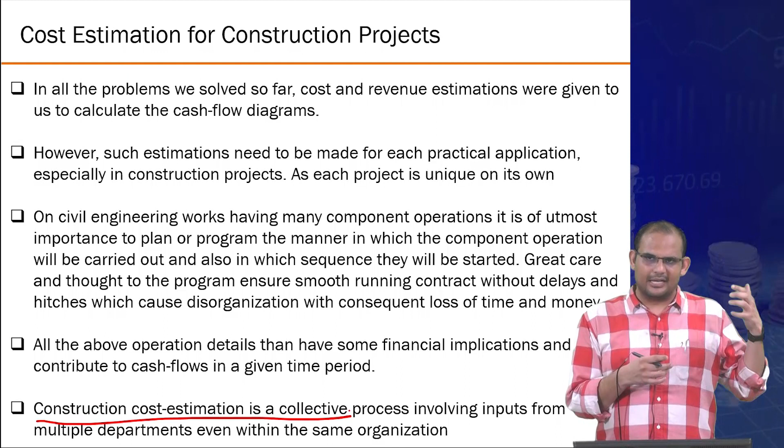So typically you will see, even in the organizational structure, at least in Indian companies, your finance department takes their monitoring activities really seriously, right? Because they want to get the latest information, almost a real-time estimation of what is happening, what the cost is. Because a lot of people ask them for this information whenever they have to plan for the next. So the finance department is really important. Their job is not just to pay you salaries and things like that. Their job is to maintain the repository of what is happening, what the material price is, or how much quantity they have estimated before, a really large repository, and then be able to help you estimate, right?

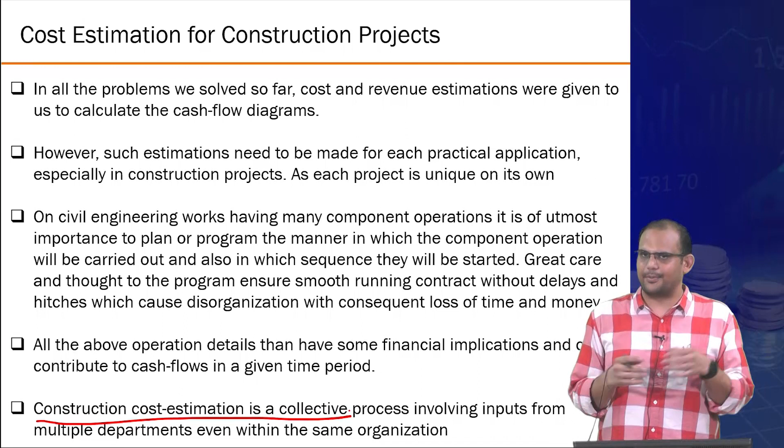I'll just give you some ideas on what kind of information you may need to calculate the typical costs that are involved in a construction project, right? So the first and foremost thing is, it starts with a construction schedule. For those who don't know, suppose you have 10 activities to finish in a construction project. That could start with digging up the ground, then laying the foundation, starting to construct the pillars, maybe the bricklaying, then the roofing, things like that. Then finally you do some sort of tiling to make it look good, painting and all.

Each of these are activities, right? And not all of those activities will happen simultaneously. There is a sequence of activities; something needs to be done before something else can start. For example, pillars cannot be erected before you actually finish the foundation work, right?

So because of that, what happens is you have some sort of diagrams in terms of how different activities are distributed over time, right? And this is very essential information, because once you know the activity, then corresponding to the quantity of that activity, you can estimate, in order to do this much activity in this much time, how many resources you will require and at what time, right? Resources could be materials, labor, equipment, machinery, whatever. But essentially, this is a fundamental backbone for calculating that.

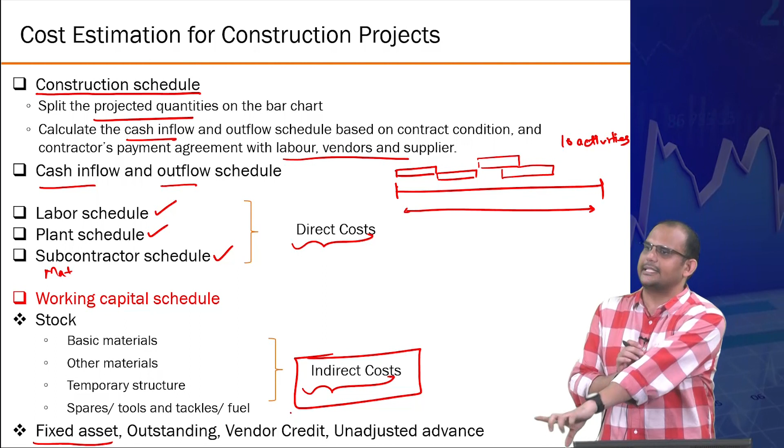And then there are other types of costs; we also saw before the fixed costs versus variable costs distinction. But here, what is most important for you is to know the direct versus indirect distinction. There could also be, for example, headquarters cost. Now, changing the scale of the discussion, while it is difficult for you to attribute some specific element to a specific activity, it is also impossible for headquarters to attribute a specific activity to a specific project, right? Like saying 0.1 man hours of a headquarters design person was useful for this activity on the construction site. It's impossible to do that analysis and often useless to do such a detailed analysis. Therefore, you club them as a whole and put them in indirect cost, right?

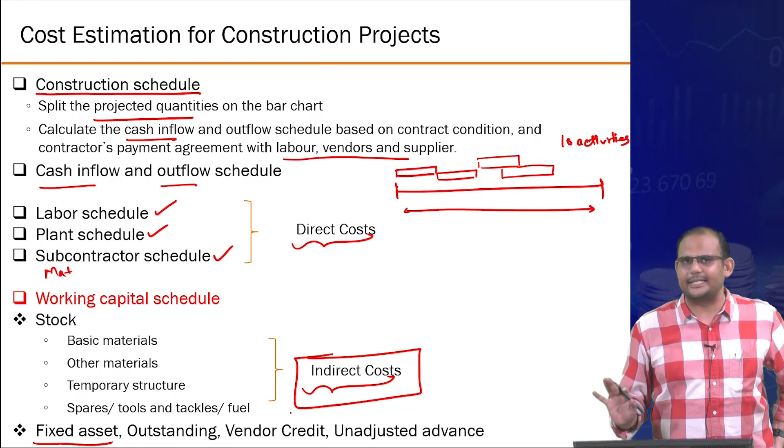Sometimes it also depends upon what you define as direct versus indirect, or how rigorous you want to be in this exercise. It also depends upon the relative volume. For example, if your direct costs are already about 80-90%, then it's okay. You can accept not knowing where the indirect cost is going; it's not significant because 90% is easily accountable. But it could be that initially you do not map the activities one-on-one and you end up with 90% indirect cost and 10% direct cost. Then you will not know what is happening with the cost and you will not be able to have better control over it. So, it also depends upon how granular you want to go, depending on what kind of activities you are doing. Okay, so basically, we are dealing with direct and indirect cost.

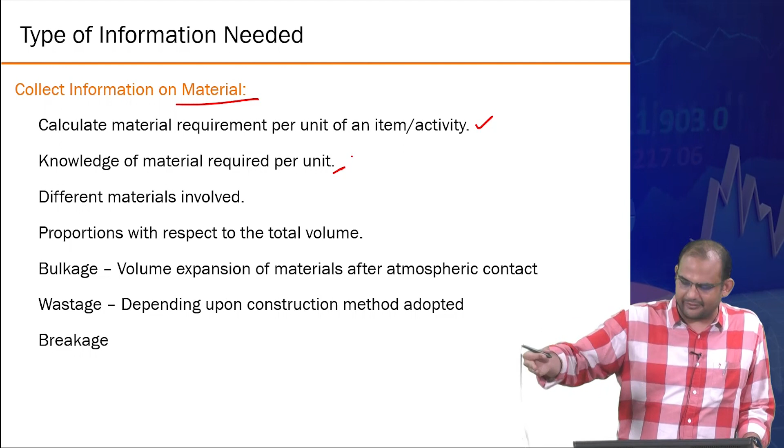Now, let me give you an example of the kind of information needed for each of these. Let's take an example of a direct cost, particularly material. In material, what factors could affect the cost, right? There is a direct requirement in terms of how many units of material are required per unit of activity, right? So, you need to know the material required per unit. You also need to know how much of the activity will be done in a specific time. With that, you need some factor of how much material is required per unit of that activity. For example, in 1 cubic meter of concreting, how much aggregate you require versus how much cement versus how much sand. All these things you can do.

Different materials are involved, and you need to have an idea. You cannot be just going blind. Every activity has different types of material requirements, proportions with respect to total volume. Sometimes if you are dealing with cubic meter as a unit, then 10% of it is this, 10% of this, and 10 to 20% is this material. All those ratios you need to have.

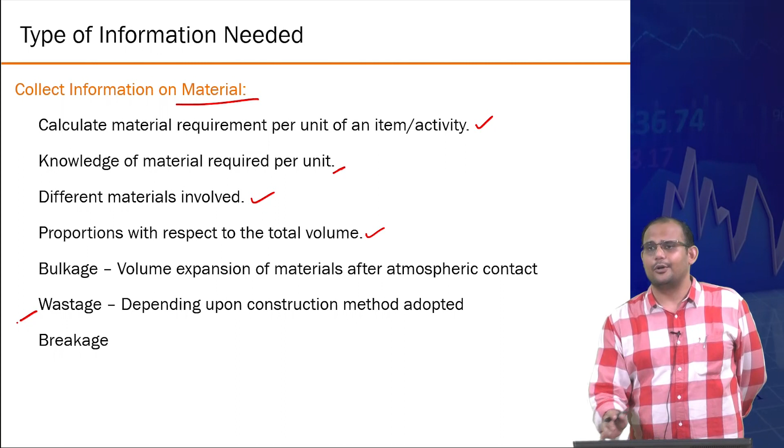There's also a problem of wastage. 100% efficiency in material usage is not there, because typically when you're preparing for some sort of transformation that requires concreting, you mix raw material, then you add water, but then you are shifting it across so many different equipments. You can't remove the wastage 100%. There will be some concrete which will be stuck to that mixer and you cannot get it out easily, and so on and so forth, right? So there is always a wastage.

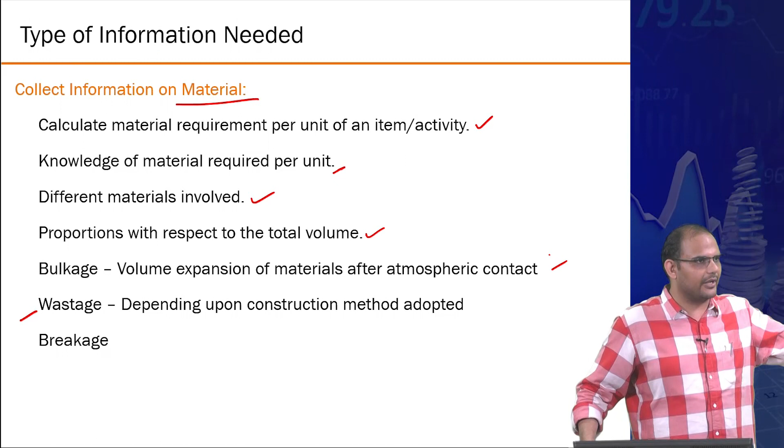There's something called bulkage, which is essentially that construction materials' final volume would be different than the sum of their individual constituent materials' volume. For example, sand mixed with water expands a lot, right? So this becomes an important consideration when you have to deal with transferring sand from one place to another, and that becomes part of your costing, right?

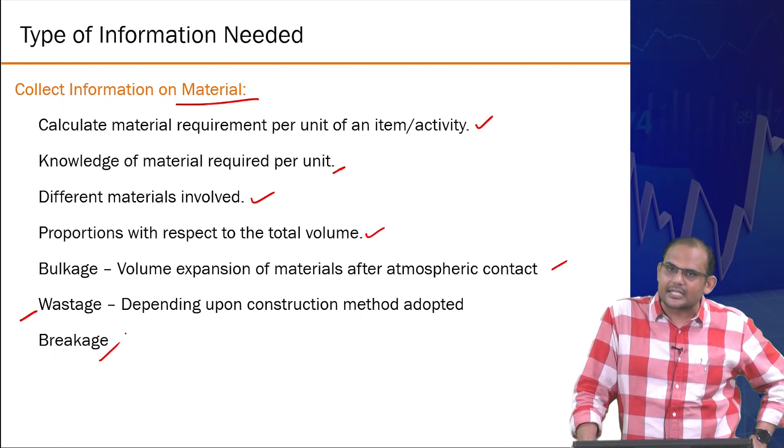And you might be dealing with breakages, other kinds of things. If you're dealing with glass, for example, it might break. Even after you have applied it, sometimes it might break. So again, you have to work around that.

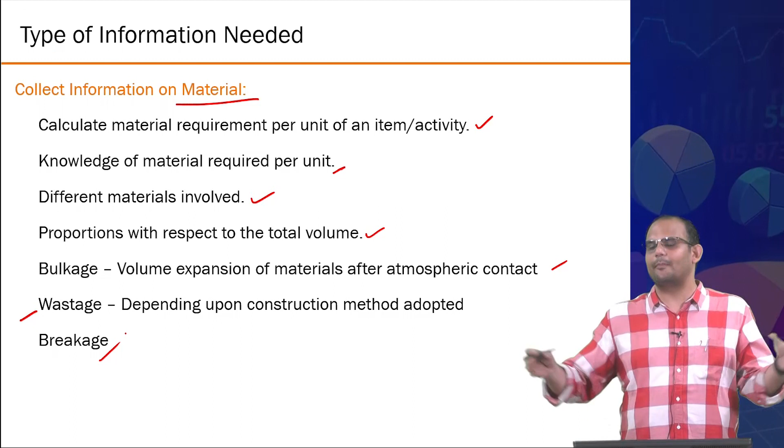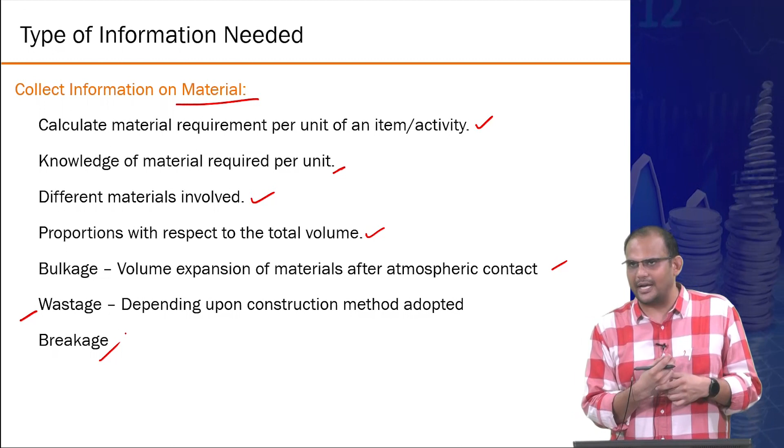In terms of wastages, I think a good example would be the rebars, right? The rebars come with a pre-specified size from the manufacturer. So depending upon how your rebar schedule is able to accommodate, you might end up with so many small pieces, or you could have optimized your rebar calculation so that you are having whole bars or longer bars compared to many small bars. Because small bars, you can never use them again. Longer bars as additional material, you can even sell them back or use them for some other activities. So all of this is information required.

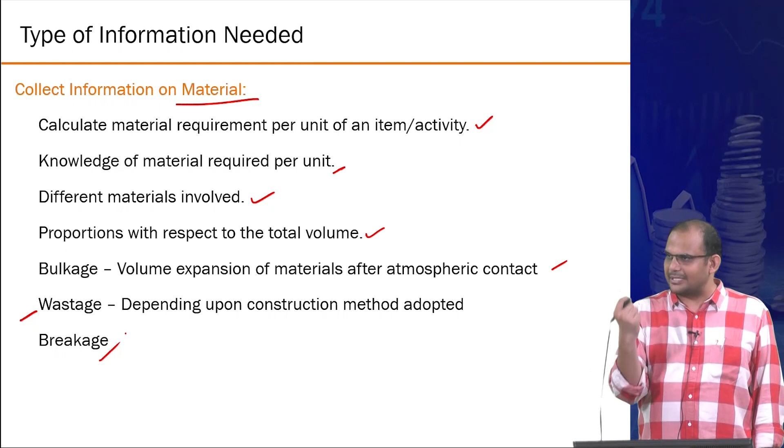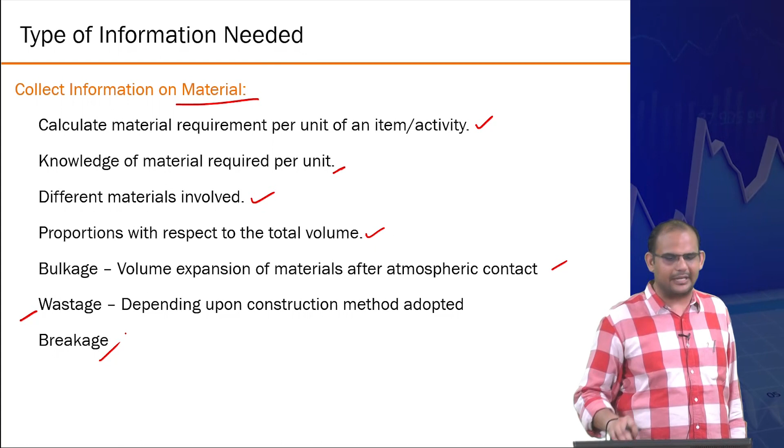So immediately you can see just the material calculation can become so complicated because there are so many different details involved in it, right? So it's very important. The job is quite serious in a way that you need to have information from many sources, right?

Just labor: if you want to estimate the human resources requirement, of course you will have to estimate how many people of what type are needed. You also need to know what is the average output of these people in terms of how many units of work they can do in a given unit of time. Now, depending upon whether they are skilled or unskilled, this number could change, or the kind of contribution they bring to a particular activity could change, right?

Then there are labors of different types. There are labors involved in individual departments who are just there for checking, approval, or some sort of supervision, sometimes just guidance. You have plant operators and helpers taking care of a particular machinery, things like that. You have different types of masons, carpenters, fitters, helpers. Then you have subcontractors' laborers coming on your site. You could have a distinction between male and female laborers, because you might need to have different facilities prepared for them, and that will have different cost implications.

So you can imagine how messy it really becomes. There are so many variable factors on a construction site. So it's not a job of a single person to handle all this, right? Just giving you an idea.

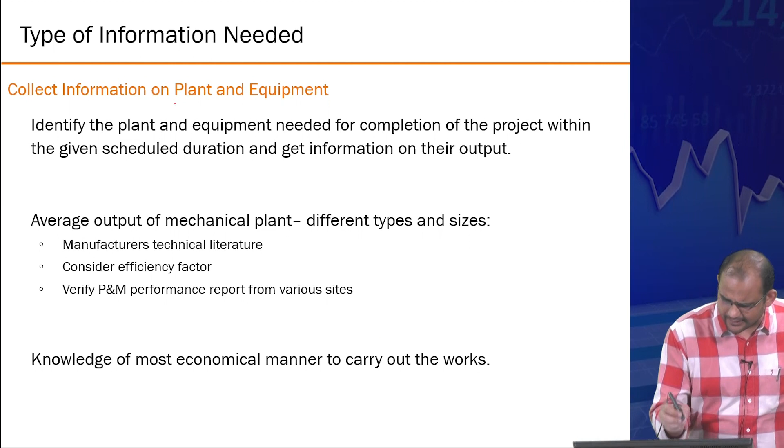Again, in terms of plant and equipment, you need to identify what kind of machinery and equipment will be needed in order to complete the project in a given schedule. And you also need to understand how productive these equipments are, right? How many units of work the equipment can do in a given number of hours. And therefore, you may need to understand the technical specifications sometimes provided by the original manufacturer of the equipment, right? When you buy a computer, you rely on the motherboard's speed and frequency and all this information. Sometimes you may need to do that, right?

For a crane, how fast can the wire actually move in a second, in a minute? All these are specified by the crane manufacturer in terms of safe operating limits. Can you really move faster, or can you make it really slow? All those things you need to know. What are the ranges? Otherwise, you'll not be able to estimate it properly.

And the machine itself may not break as much, but the machine is clubbed with a human. So the average efficiency of both of them needs to be taken into account. A human will require some break, even if working a simple job, just pressing a button. You can't keep on pressing the button for 8 hours at the same efficiency level.

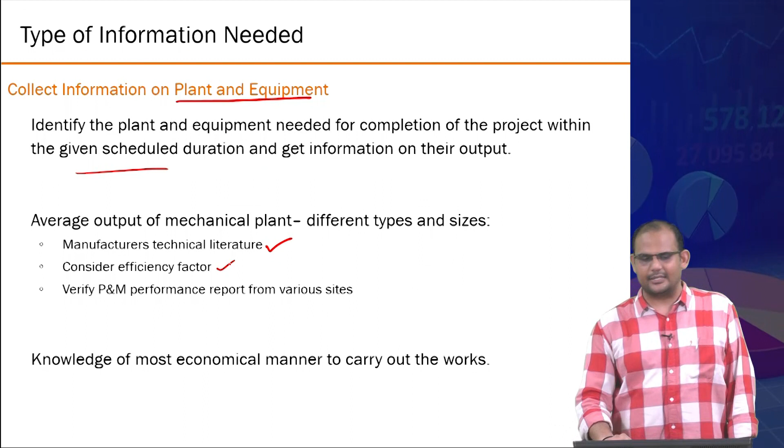But the machine only works when the button is pressed, even though the machine's efficiency is not different. So with a combination of them, you need to have a joint estimation of the efficiency, and many things. The whole idea is to show you that this is a slightly complicated topic when you actually have to

do it. And typically you will see people working in the finance department, over the years they accumulate so much interesting knowledge about the whole system because they have gone through so much information exchange. They really understand what's happening, what's not happening, where things are, where things are not. So they become very knowledgeable. So that's always there. This is just to give you an idea.

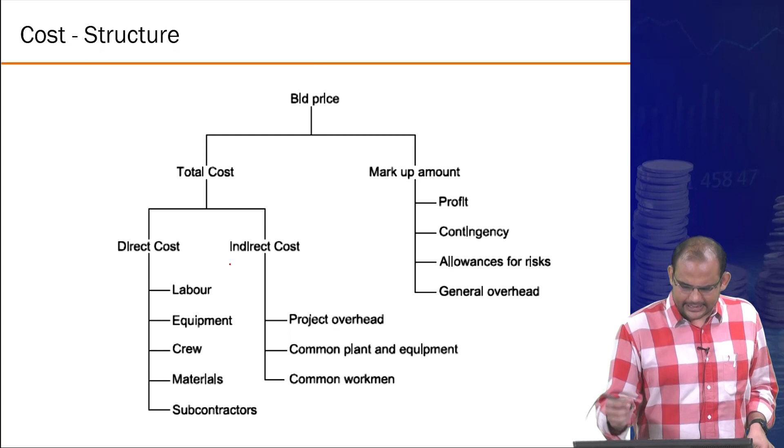Again, this is not directly related to our discussion topic, but a typical bid is essentially the price that a vendor or a subcontractor quotes, that I will do this work for this much amount, right? In a typical bid, of course, there is some profit percentage, margins and all, but it also involves a component of cost. If I have bid, let's say, 100 rupees, it could be that 20 rupees are my

expectation of profit for the risks that I'm taking or whatever. 80 could be my actual cost. It's not like 100% of it is coming into my pocket, right? There is a cost to actually do those services. And this is the general structure that you follow in any civil engineering project.

The direct cost: the labor, the equipment, the crew which handles the specialized machinery, the materials, and any subcontractor cost. These are classified under direct heads. Then the project overhead: the common plant and equipment, and common workmen. Common workmen could also be there. Some specialized machinery, for example, or a project manager, let's say. He or she is overseeing everything.

They are not attributed to any specific activity. So they are also considered in the overhead and sometimes in the indirect cost. Okay, this is a general one. Depending upon how granular information you have, you could attribute some here and there. This is the generic structure we follow. Okay, any questions so far?

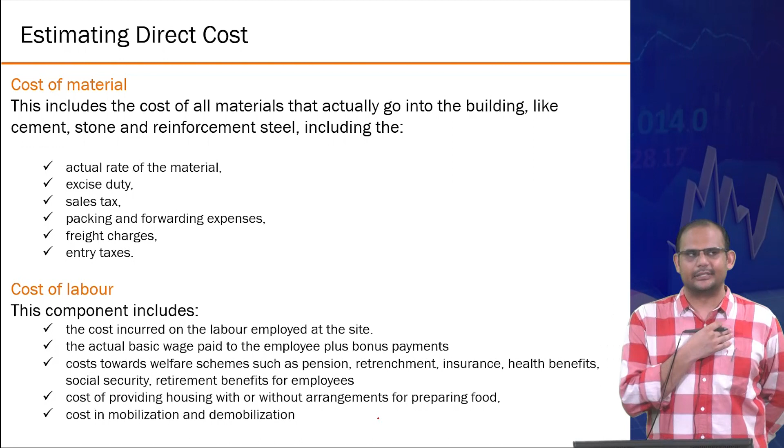Too much story, no numbers? Let me see if I can bring numbers. I'll bring them soon. But I'm still giving you a little bit more idea on what kind of details are needed in order to estimate these costs.

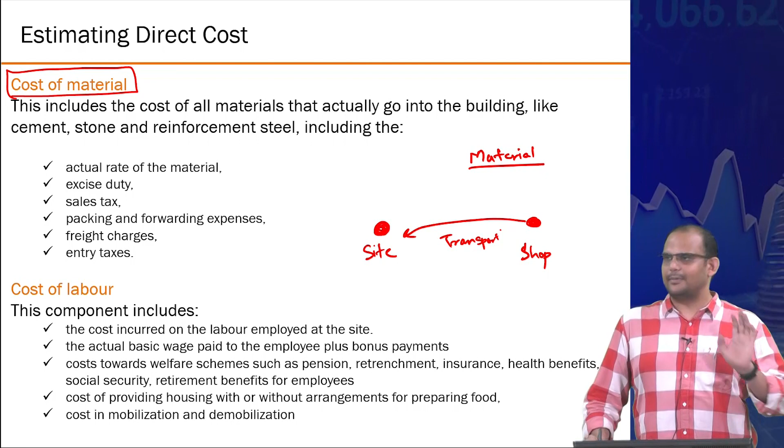So direct cost, when you're talking about cost of materials, I'll give you an example. When you are buying material, it is not being produced at the site, maybe at a shop, right? And there is going to be a transportation cost, right? Now one possibility of accounting is that all transportation cost you will deal with separately. Then you will identify individual transportation costs associated with each of these materials each time it came, right?

Or the other possibility is that you club this transportation into the cost of the material that you're talking about. Maybe 1%, 2% of the material cost typically goes into transportation, and therefore does not require any additional mention. It's just clubbed with the material cost, right? That depends upon what you are interested in.

If as a company you are worried about your transportation cost, then maybe you need to do the exercise where you track individual transportation cost very minutely. In that case, the material cost will be separate, the transportation cost of total material would be separate, transportation cost of machinery would be separate, and things like that you can still deal with. Or you club all these into the individual activities, and that is still okay, not a problem.

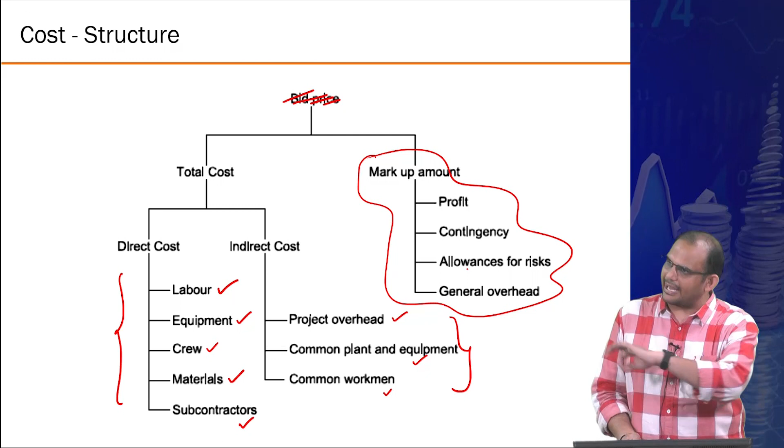So it's not 100% foolproof that this method will cover every possible type of cost. Depending upon your chosen reference or how detailed you want to track a particular cost, you could adopt something slightly different, right? Theoretically, you should be able to attribute each transportation to each activity. But then if a laborer takes an Uber to come, which activity does it go to?

Or a project manager takes a car to come to site, and the fuel cost of that will go where? Right? So all of this becomes messy. You can go as detailed as you like, but then is it really worth it is the question, right? So this is a general one, but it can change depending upon what you want to do.

All right. So in general, for cost of materials, there is the actual cost of material. Sometimes you need to pay some taxes. So again, if as a company you are interested in how much tax you are paying, then you might tackle the tax separately. But on the other hand, you could say, okay, the lump sum cost of material is 110 rupees instead of 100 rupees. That's the calculation I'll keep and I'll count it completely as a material cost, right?

See, in modern uses of computers, you can actually do this easily because at the click of a button you can aggregate that same data differently and you will still get good estimates. But how does it go? Sometimes the billing itself does not have that minor level of detail once it finally goes into a digital system. Therefore, it becomes a problem.

Sometimes you can't even track all these things, right? Packaging of the material: if you need to pay, do you count it separately as a packaging cost or do you count it as a material cost? Freight charges, entry taxes, all these things are typically included directly in the material price for per unit calculations.

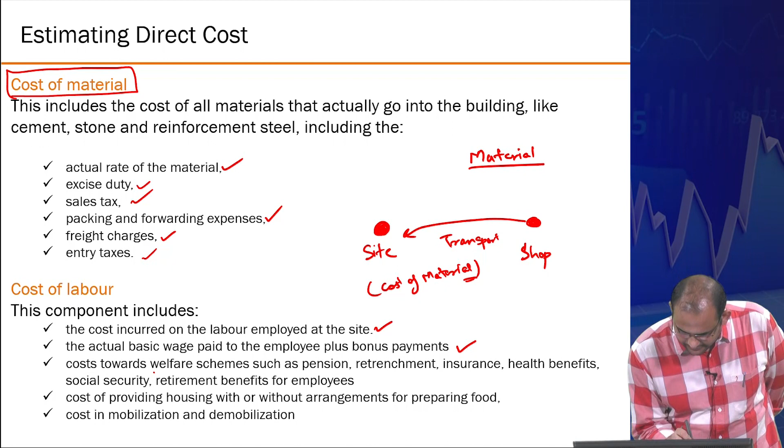Okay. In labor, there is the actual cost to employ the labor on site, which sometimes involves the basic wage, average wage, plus the bonus, right? Bonus you could track separately or you could keep it there. Welfare schemes, pensions, retrenchment, insurance, health benefits, social security, you could again track them separately, or per unit labor you could track to a specific activity, right?

Cost of providing housing with or without arrangements for preparing food. All these are real issues. You need to have a suitable facility for labor to live in because you don't want them to travel from somewhere every morning, or sometimes your schedules are working in the night. So they need to have a labor camp nearby, and their families will also live there. So these are all part of your cost of construction projects.

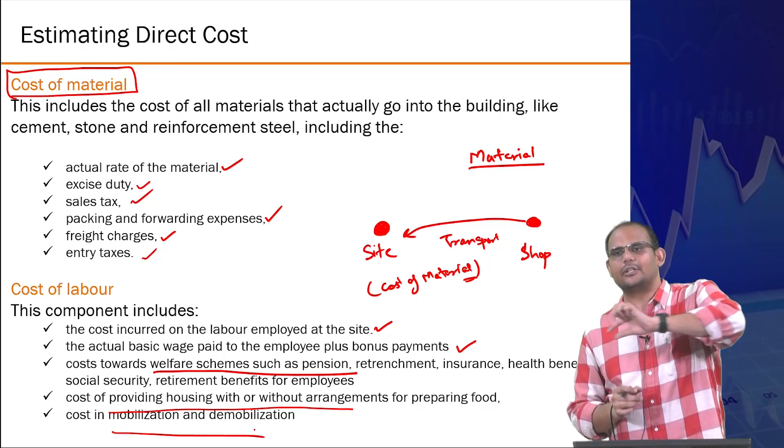And sometimes there is mobilization and demobilization, in that you need to bring, let's say, 100 laborers from a particular place to here. Now they could ask how will we come? You need to arrange for a transportation vehicle, maybe a bus or whatever. So all these are in general attributed to direct labor cost instead of tracking each of them separately, so that your life becomes a little bit easier, right?

So the main point that I'm trying to tell you is there can be even more detailed bifurcation, and you could attribute some of this cost to an indirect cost theoretically, but is it worth it is the question that you need to ask before you start doing that.

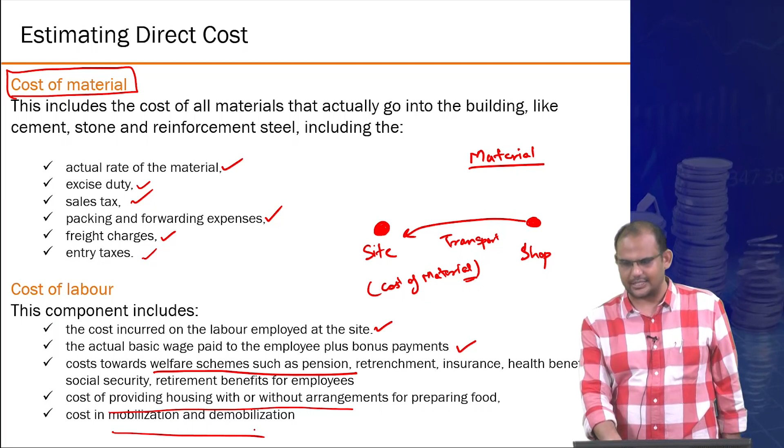Right, then cost of plant and equipment, it has many things. For example, of course, you are either owning or leasing, so that's the cost required. Mobilization: sometimes you bring a machine and then you need to assemble it on site, so you need to have a cost built in for that. Operating, which you are paying the laborers for. Cost of fuel, oil, lubricants; all these machines require diesel or some sort of fuel source. Where is the cost of that going to go?

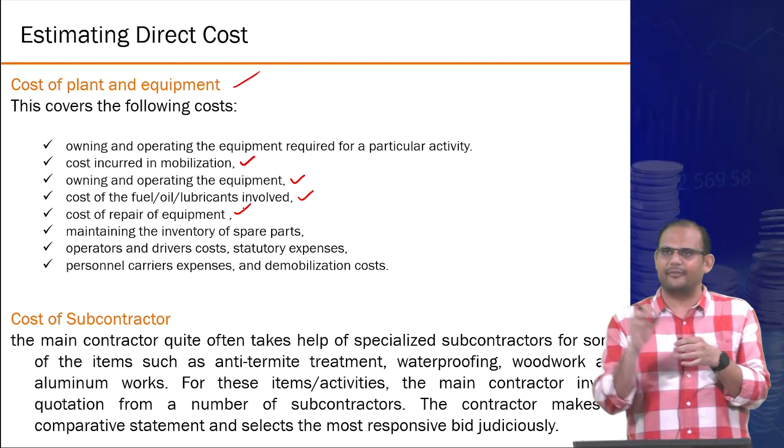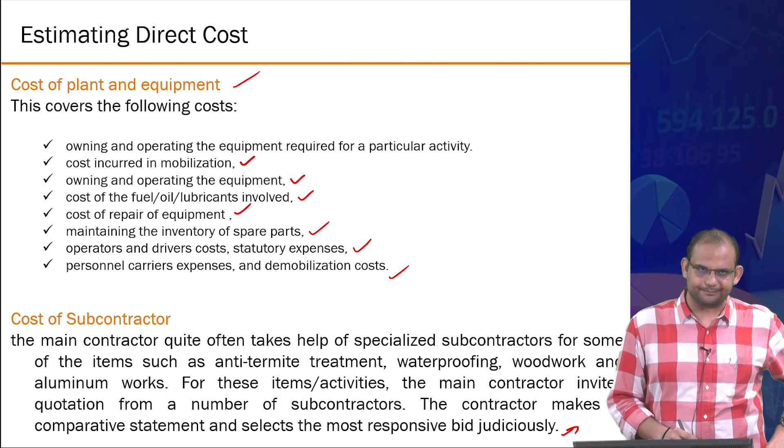If repair is required, in construction you will rarely find a repair or maintenance head in the balance sheet or in any project activity, because that is just clubbed into the equipment part. Okay, whatever 5% money we paid, it goes into the equipment side of it. Maintaining spare parts, operators, drivers' cost, any other demobilization cost. These are typically included lump sum under plant and equipment, and therefore it goes directly to a particular activity, right? And subcontractors is again a similar story. With me so far? All right.

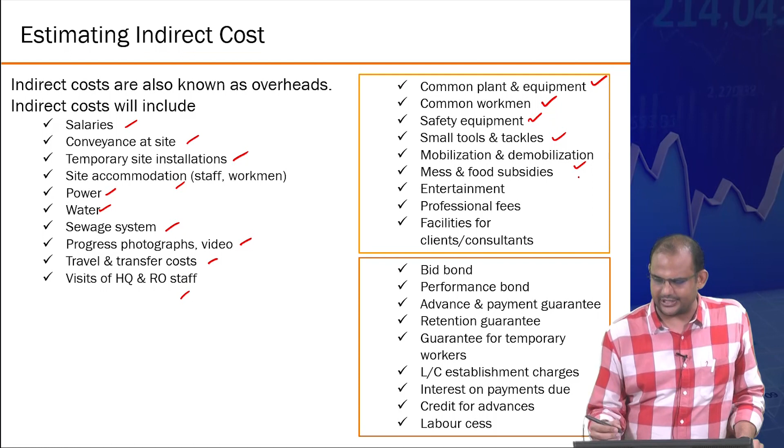Common plant and equipment, safety related equipment, for example safety nets; these keep on moving up floor by floor. You can't attribute them as this is floor 1 safety equipment, kharcha itna, right? You can't do that. So typically that goes into common. Small tools and tackles, mobilization again, mess and food subsidies, entertainment purposes.

See, as a project manager, it's not only about getting the machinery done; you are ultimately leading people. And for people to function, all these things are basic necessities. You do need some sort of entertainment, some sort of regular life outside the work, and you need to accommodate them, otherwise your projects will not function, right? So if you actually go to some big sites, you will see labor camp management itself becomes quite an interesting and challenging task, because machinery can function on remote or robotic or whatever your instructions are. People you need to deal with differently.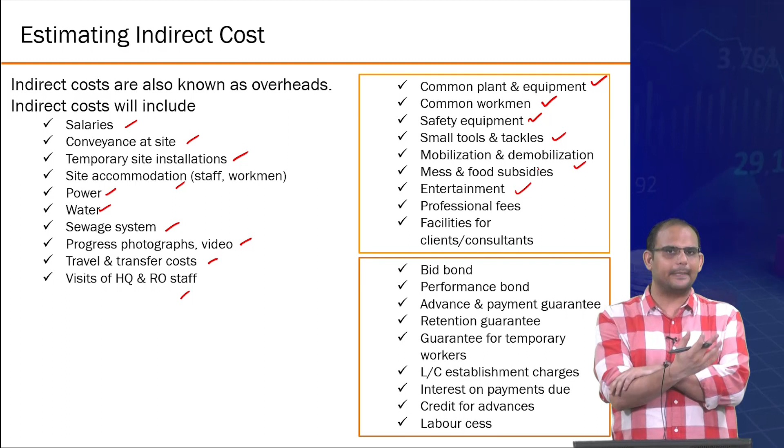And in general, good project managers will always have good people management skills as well, right? So that's a part of the job.

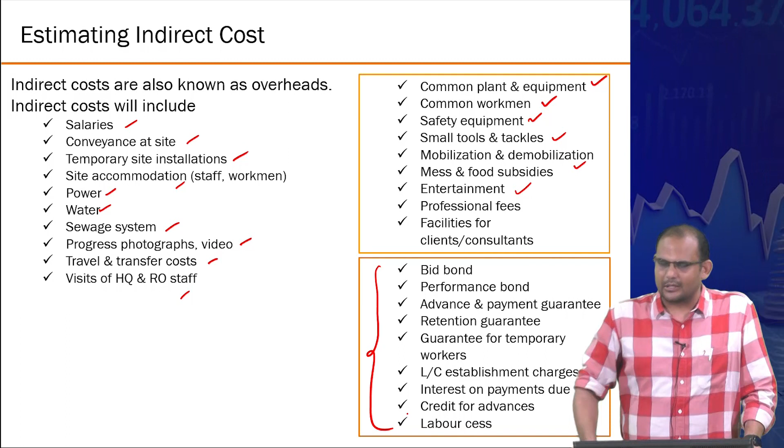And then there are certain indirect costs. This is more on the contract side of it, which I'm not going into in too much detail, but essentially there is a lot of money that you may need to give to the client as a guarantee that you will do a good job, and the client wants to secure their position. It's basically risk transfer, like bid bond, performance bond, advance payment guarantee. These you can attribute uniformly over the entire project.

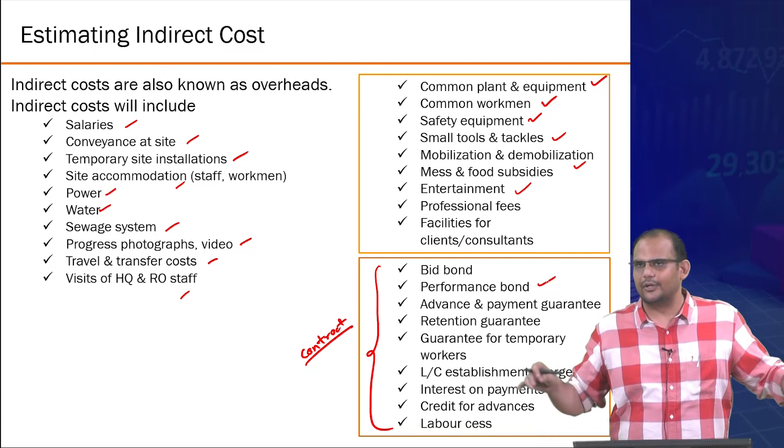Okay. All right. So I'll just leave it here. You can go through these slides later. Again, just skipping one slide.

Now, essentially, how do you do this? The simplest way of dealing with this is you define something called a unit. You estimate all the charges per unit, and then you simply multiply the number of units with that per unit cost to estimate the total cost, and similarly you keep on aggregating different types of units. That's the idea.

Now, the definition of unit keeps on changing. That's the tricky part, because you cannot have one uniform way to define a unit. Concreting work you define through cubic meter, usually a volume. Wall paint job you usually define in meter square, which is the surface area. Brickwork, sometimes you define by number of bricks, or you could define it by surface area also, because the depth of the brick remains the same. So it's tricky, it keeps on changing.

But the idea is you define the activities, you define a unit, you calculate the total number of units, you estimate the cost for each unit, and you aggregate to get the total cost that we need to estimate, right?

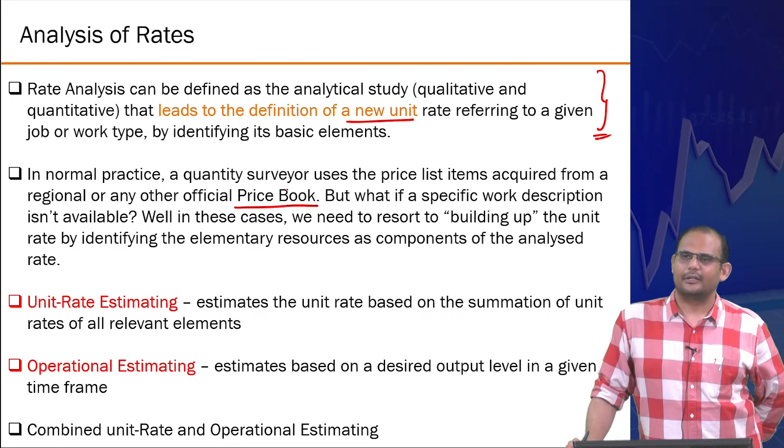Now, how do you estimate the cost of an individual unit? You actually rely on something called a price book, also often called a schedule of rates. Typically these are government issued norms, that for skilled labor, this is the average acceptable price, and this is available state by state, and periodically gets updated every 5 or 10 years. In India, you have a reasonable number of estimates.

So you could rely on these numbers as a reference, or if it's a very specialized activity that does not fall into any of these predefined units, you could create your own unit and do the estimate for that. That depends on your project requirement. But the typical idea is that you rely on pre-existing units as much as possible, or you define yours and then do the work.

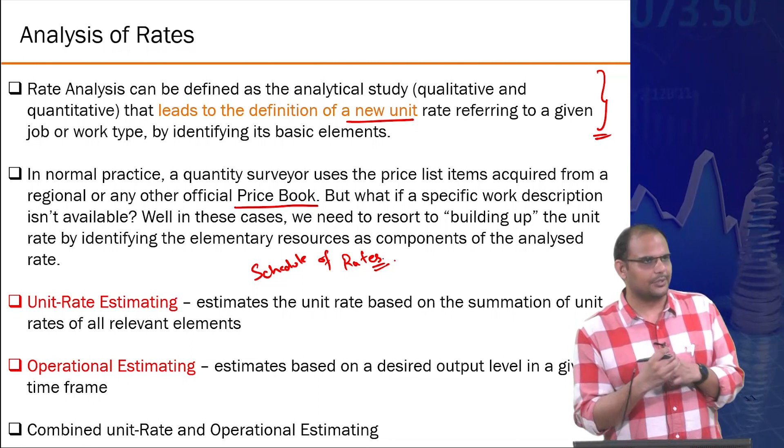Okay. Now there are two major ways, again just for the definition of it. In reality, you end up using both of them together; there is no clear way to distinguish them in a real project. One is called unit rate estimating, where you estimate the unit rate based on the summation of unit rates of all relevant elements.

For example, in 1 cubic meter of concrete, 20% of that is sand, so what is the cost of that 20%? 30% of it is cement, what is the money involved for the water, whatever. You combine them and say this is the unit rate of 1 cubic meter of concrete, because so much material was required in that.

The other is operational estimating, which essentially deals with productivity norms. For example, if you want to estimate the labor charges for 1 cubic meter of concrete, how do you do it? There is no per cubic meter labor charge. You have to estimate how many laborers for how many hours would be required to achieve 1 cubic meter of concrete, and then you balance them out. So this productivity related information is also essential.

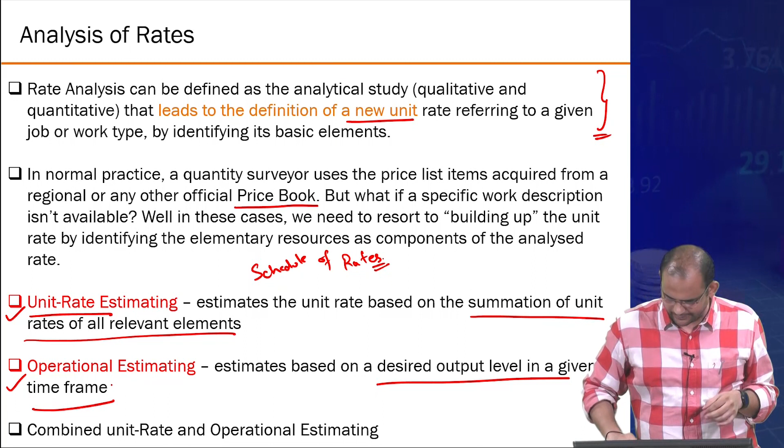So this is called operational estimating, and typically you combine both of them in a measurement, and I'll show you an example. But you got the basic idea. One is simply summation of the cost in a proportion. The other relies on productivity related norms. In reality, you need to do both; there's no one way about it. Alright, so let me give you an example of unit rate estimating.

Do you know what OPC 43 is? Basically a grade of cement material. 1 metric ton is 1000 kg, right? So let's estimate how much is the cost of cement needed, right?

So basic rate of material, cement factory price inclusive of all taxes, not excluding. It's basically cement factory price plus all taxes. This is the basic unit. For what is this? This is only for cement. This is not even for concrete, just for cement. Okay, you are not dealing with concrete. 1000 kg is the total you need to estimate it for.

So unit is 1 metric ton, quantity is 1. For the cost, you assume that these costs are given to you, maybe from some reference material, or you have collected all this information. So this comes out to be 5,700 rupees, right? Transportation to site, maybe a flat fee of 1000 rupees.

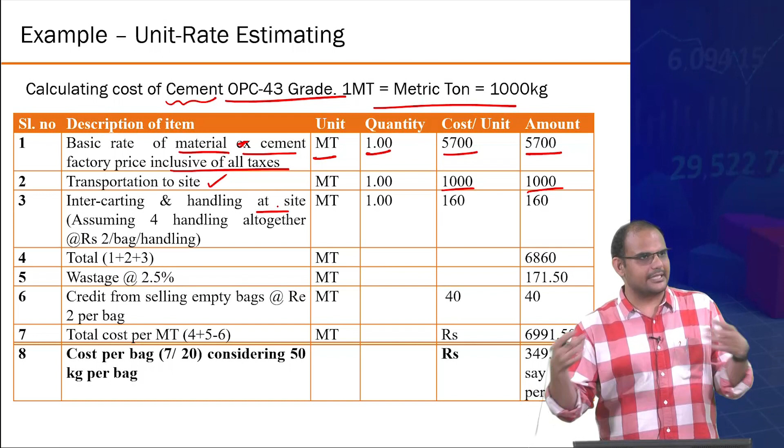Intercarting and handling at site. So typically you see people actually load and unload these cement bags, maybe once from the showroom or whatever shop to the vehicle, and then finally from your vehicle to the place. In that also there could be multiple transportation, because one person will lift it and put it on another person's head, and that person will put it where the actual stock of material is being handled.

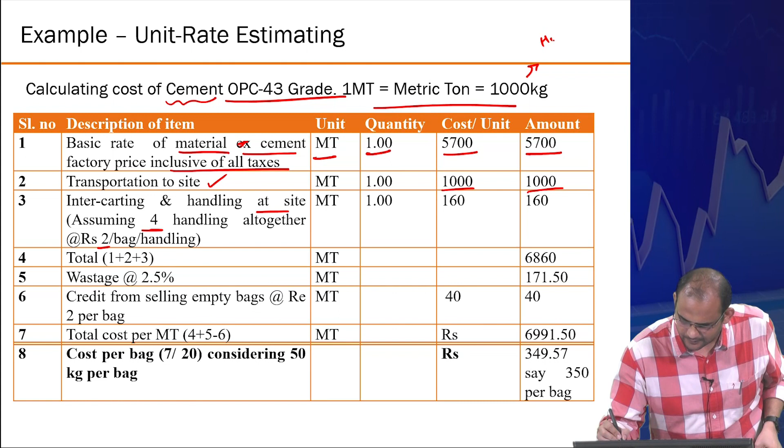So it's given that on an average for each bag you need to handle it 4 times, and for each handling you are estimating 2 rupees per bag per handling, right? So 1000 kg, how many cement bags? How many? 20. One cement bag is 50 kg.

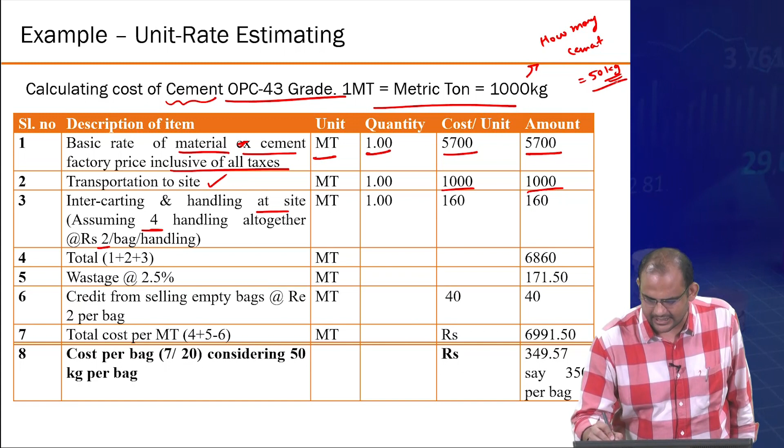So again, you need to know this, otherwise you can't do this calculation. You could have a 1 kg cement bag, then your cost of handling will become extremely different, or if you are assuming a 100 kg cement bag. So this is where the real knowledge comes into the picture, that you cannot be oblivious of these day-to-day conventions that are applicable in construction. But okay, 50 kg is the standard cement bag size. So in 1000 kg, there are total 20 bags.

Each bag requires 4 handlings, and each handling requires 2 rupees. So the total charge of just handling cost is 160 rupees, right? The total for this is 6,860. Some waste. On an average, you are assuming 2.5% waste. Again, this is where your margin gets built, because you are already taking a factor of safety in everything.

In civil engineering, we have a very convenient way of doing things. If we can't estimate, we take a 1.2 margin, 1.3 margin, and everything will be settled in that. That's how the game of civil engineering is. So waste is 2.5%. So this is coming out to be around 170 rupees.

This is a very interesting Indian concept, where the empty cement bag can be resold. There's a market for that. People will pay for this. So if you keep the bag in reasonably good quality, and it has been opened from a very specific area, you can easily reseal it and use it again. So it has a market. So that has 2 rupees per bag. So you actually get 20 into 2, 40 rupees back out of this.

See, I am estimating this also as part of my cost, so that later I don't have to worry about what happened to that money when it was sold again, right? So the total cost is coming out to be about 6,992 rupees. And so per bag, it will be somewhere about 350 rupees per bag, right?

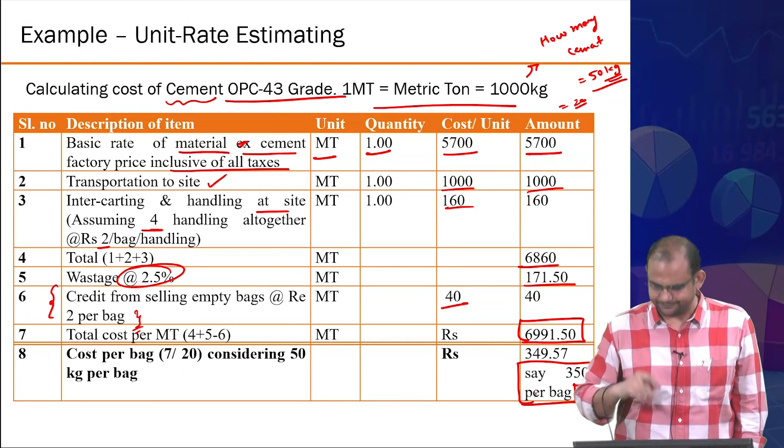Similarly, you can also have reinforcement. Let's say 1 metric ton of Fe415, which is the steel grade, essentially rebar of that. So this is coming out to be some 35,750 rupees. Transportation to site, let's say it is already included. It is not additional. Handling, 300 rupees is given to you; you could estimate again how many rebars and all.

Wastage is 3%. Deduct for scrap, because all these small bars you are finally reselling, maybe you are getting some money for that. So around 12,000 rupees. So this is how much you need to pay for 1000 kg steel. Similarly, fine sand, basic cubic meter.

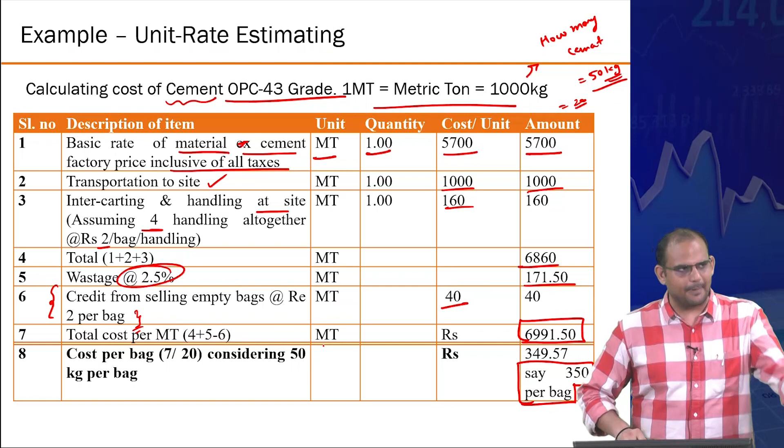Here the unit is cubic meter, right? Sand is more of a bulk volume. Cement is also powder. You could have done it in cubic meters, but here the unit is bags. Here the unit is tons. Here the unit is cubic meter. And this is how different units are.

This is how the cement industry is, or this is how in general the construction business is, right? There's all sorts of units that you need to deal with. So basic cost at site for 1 cubic meter is 760 rupees. Some screening you need to do sometimes. The sand is not pure. You need to pass it through multiple sieves to get only the good content.

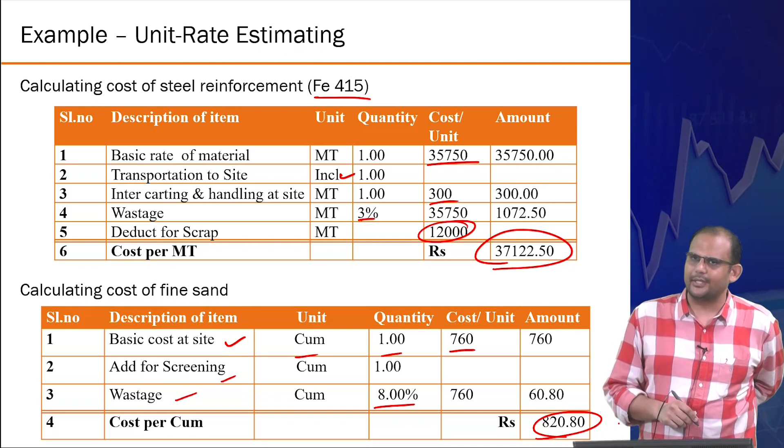Some wastage also happens, assuming 8%, because sand comes with a lot of impurities in it. It comes from many different sources, not as quality controlled as the cement bags, or not as certified as your steel bar. But sand, you don't know what is mixed in it sometimes. So let's say on an average that is wasted. So it comes out to be 821 rupees.

I'll just give you a brief example of labor, right? One of the fundamental things that you need to know in labor is the wages for skilled, unskilled and semi-skilled are different. Typically, of course, you can define mason versus bar bender and so on, but on an average you could also classify them as skilled, unskilled or semi-skilled jobs. You could have a further distinction between skilled male versus skilled female. There are real differences on site.

On paper you could say that there are not, but in the real world, yes, women get paid less in most of the construction activities, and most of them are not even classified on the skilled side. They are generally kept to the unskilled type of labor jobs, right? That's the reality. So basic rate.

In this basic rate, you are assuming 8 hours of time, right? It's also called, I'm forgetting the Hindi name for this, Hajri. It's typically called Hajri. Hajri is like one presence. One presence means 8 hours of work. That's typically how you define the daily wage for people. So basic rate, you are saying that skilled is 673, semi-skilled 610 and unskilled is 536 rupees.

This is not per hour, and this is also not per day. I am assuming that in a day they are working 8 hours. Again, you need to know this convention about the industry in order to get this. They also require some minor tools which they usually carry with them, for example a mason would have that plumb to check the level and all those things. They always carry them, so you need to pay for that. Let's say 7.5%. If they do overtime, you need to pay for that.